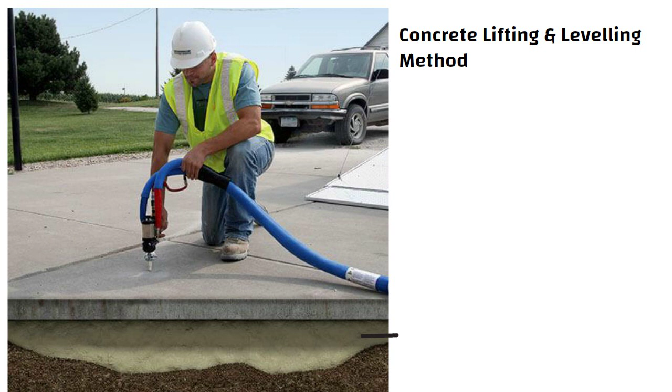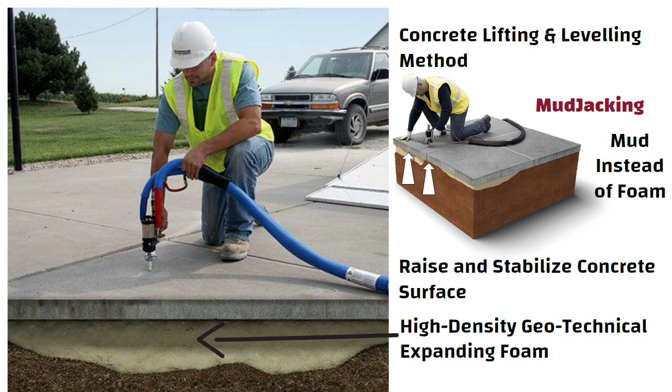Hello friends, polyjacking is a concrete lifting and leveling method that uses high density geotechnical expanding foam to raise and stabilize concrete surfaces. A similar process with the same objective is the process of mud jacking, which uses mud instead of foam to lift the concrete surface to the desired level. In this video, we will discuss the major features and benefits of polyjacking in repairing the concrete slabs.

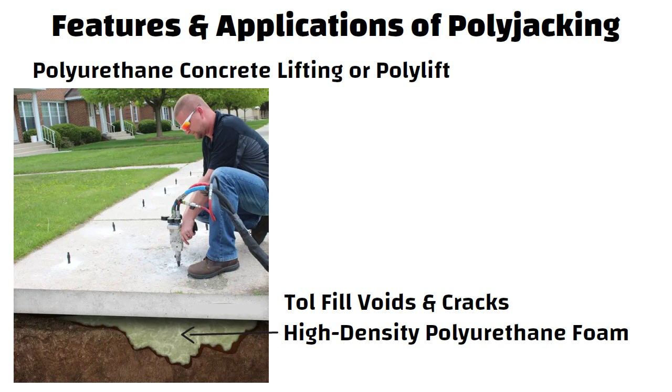Features and applications of polyjacking in construction. Polyjacking is also called polyurethane concrete lifting or polylift. In this process, holes are drilled over the settled concrete slab and high-density polyurethane foam is injected into the holes to fill the voids and cracks. Once injected, the polyurethane foam expands to 7 feet under each drilled hole. This expansion facilitates the raising of the concrete slab while stabilizing the structure.

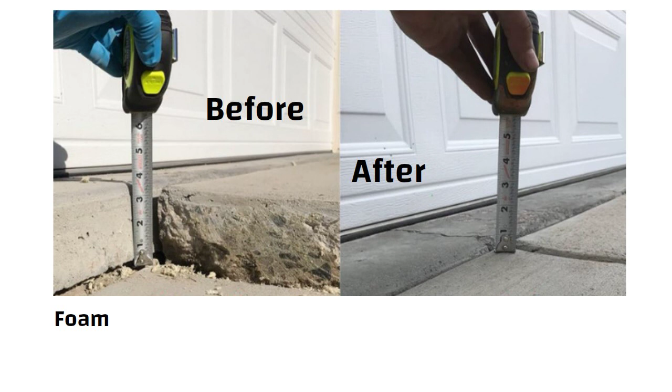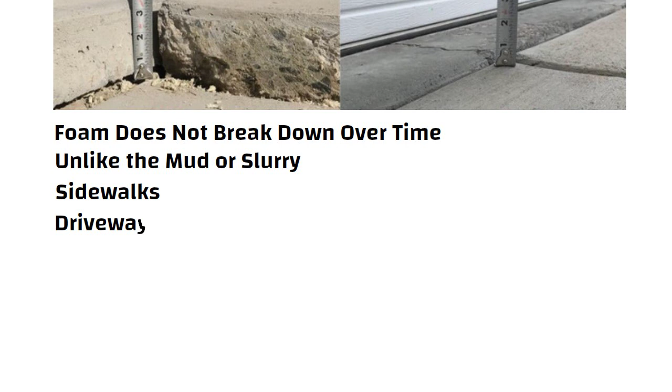The foam used for the polyjacking process does not break down over time, unlike the mud or slurry used in the mud jacking process. Polyjacking can be used for sidewalks, driveways, walkways, garage and basement floors, repair of office floors, sports arenas, warehouses, etc.

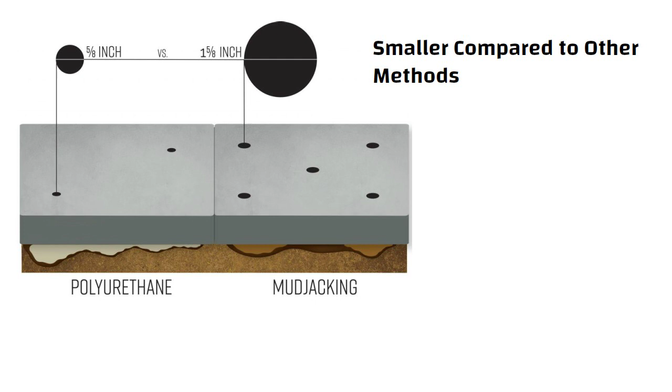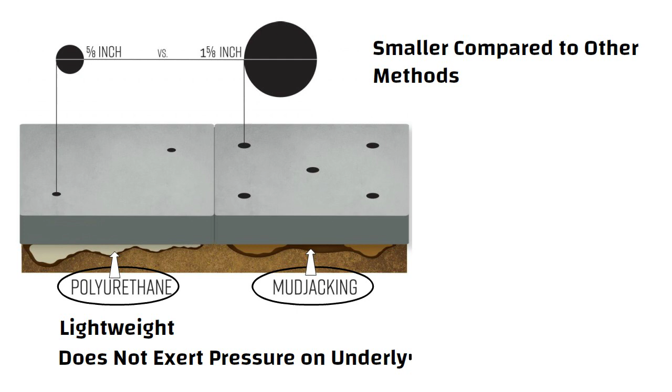The holes drilled for the polyjacking process are smaller compared to other concrete repair methods. The polyurethane foam material used for the process is lightweight compared to mud jacking slurry. Hence, it does not exert pressure on the underlying soil. The process involves drilling fewer holes to inject the foam material.

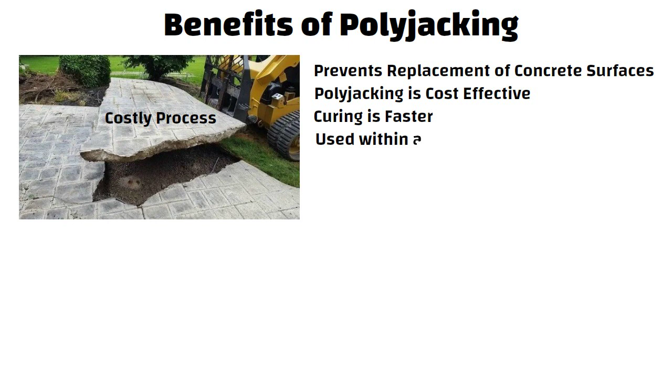Now let us discuss benefits of polyjacking in construction. Polyjacking prevents the replacement of concrete surfaces, which is a costly process. Hence, polyjacking is cost effective. The curing process is faster and the surface can be used within a few hours. The process maintains the compressive strength and structural integrity of the concrete surface.

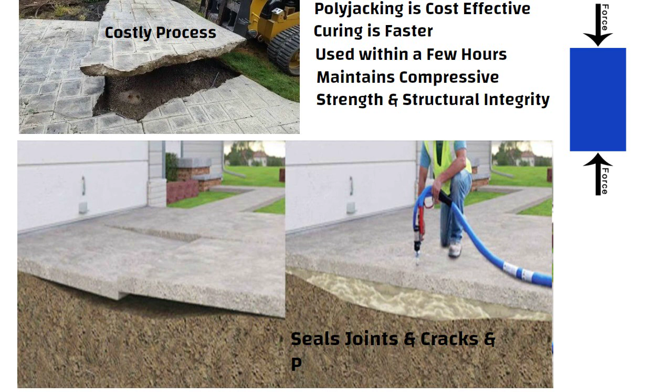It seals joints and cracks and prevents future undulations. Polyurethane is an environment-friendly material composed of 39 to 49% renewable and recycled materials. There is no concrete or grout splatter during the process, creating a clean working environment.